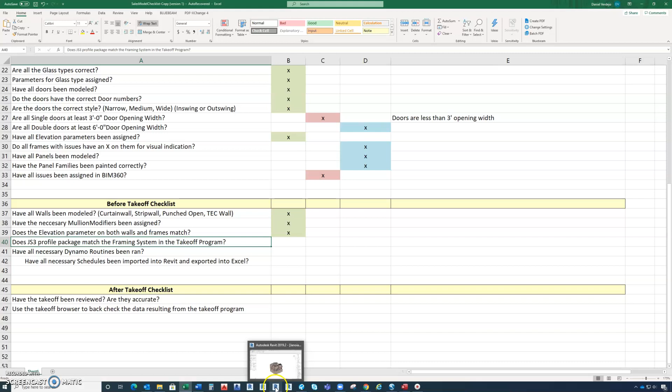In this video, I'll be showing how to check if the Jumpstart Package 3 profile package matches the framing system in the Takeoff program. So what I like to do is I like to have three things open. So mainly for the Revit, I like to have the Takeoff browser open with the mullions listed alphabetically like this, because that's how they'll be listed in the Takeoff program.

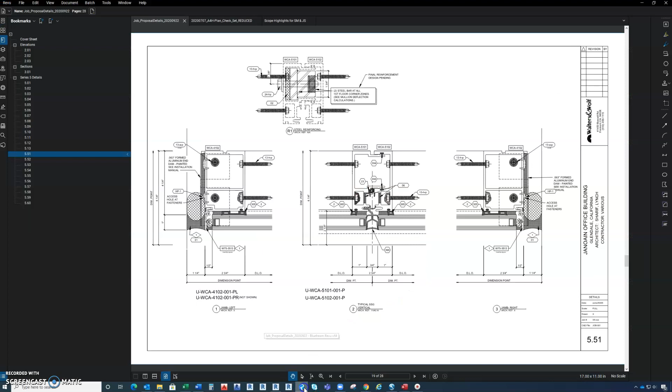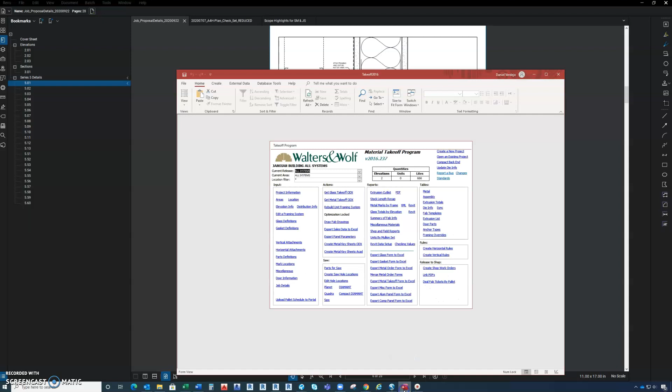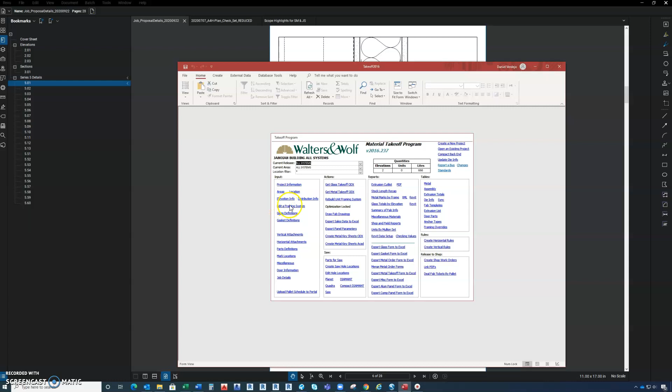So I'll put that on the side, and then I like to have the Jumpstart Package 3 profile drawings open, and then the Takeoff program. And in the Takeoff program, the way to check is by clicking on this feature, edit the framing system, and then here it'll list out all the aliases that are included in the model, and then the part numbers that are included in the profile package.

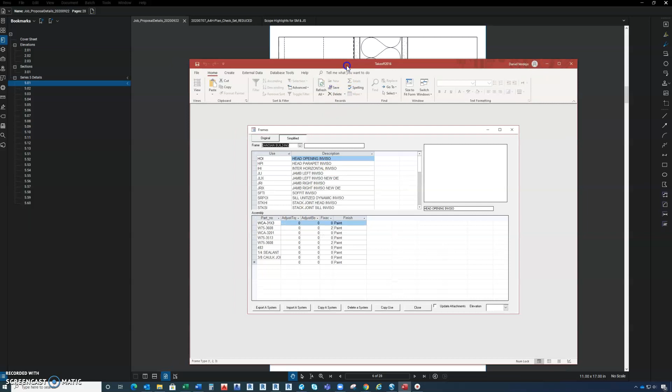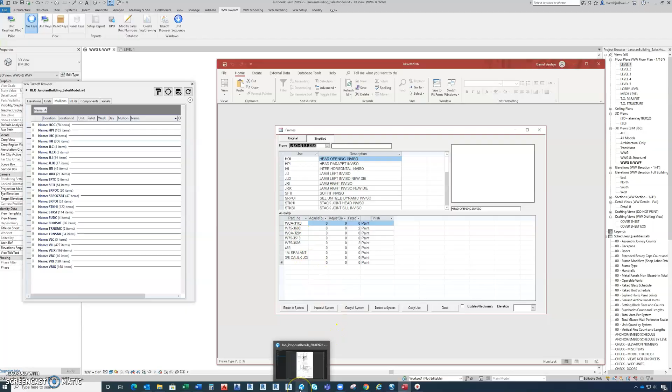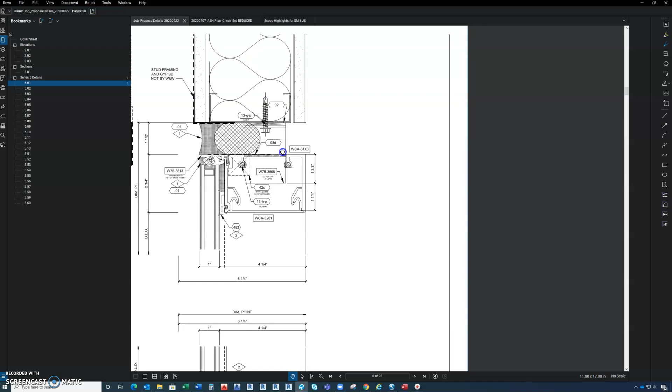So what you want to check is to make sure that all these aliases are listed here in the Takeoff program. Make sure that they're all listed there, and then make sure that the parts in the Jumpstart Package 3 match with those aliases. So let's say this head opening INVISO, which is already clicked on, and it has these part numbers. So basically, make sure that all these part numbers here match with the part numbers that are listed here.

So let's say WCA31X3 is listed, and it is, there you go. And then W753608, which is this right here, it's listed. And make sure you also note that there's 2 per unit, and they're 2 inches long. So 2 per unit means that there's one on each side of the unit. So in this case, it's only used on one side. We'll only use it listed once, or no, listed twice. Sorry, since there's 2 per unit, so listed twice.

And then here the Fixed column right now is 2, and that's for the length, because if you leave it at 0, the program will think that that part is present all throughout, or basically the extrusion will be the same length as the unit. So with 2, this tells the program that it's 2 inches. And make sure to list it again, which they did here, 2.